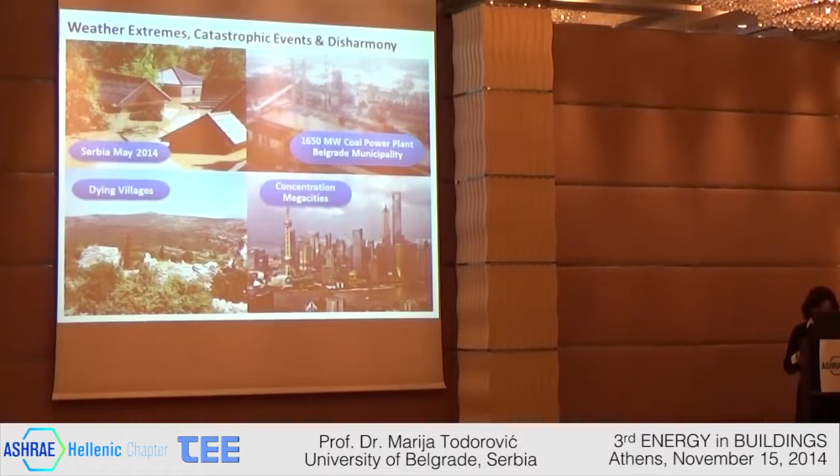Bottom left is one Mediterranean rural village which is dead, without people. That is Zagora in Montenegro. In these areas, it's important around the world to stop this huge migration to cities and dying rural villages, and to preserve cultural and natural resources, and to have sustainable local development based on preserving natural and cultural heritage.

There is one project of the Council of Europe running in Croatia, Cyprus, Portugal, and then it started also in Serbia, taking 2 municipalities. Most of the people engaged were thinking just about tourism, about craft and so on, but my intention and proposal, which was already accepted and will start in these 2 municipalities, is: okay, we will develop tourism, but everything is to be based on natural resources, so energy, renewable energy sources are to be used.

There are a lot of very important sites, for example a famous 5,000 to 6,000 years BC settlement in Serbia. They already had writing. There is also a mine there. It belongs to world history. It is to be preserved.

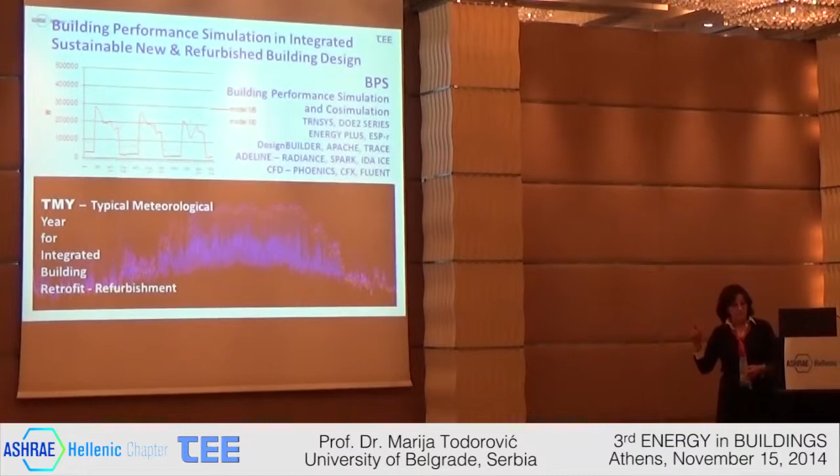For example, there is no summer regime. If you fix the building for winter only, then you will have peak loads in summer. So building performance simulation is to be used even for new design buildings, but also when refurbishing buildings. It is necessary to bring buildings to the best possible state concerning knowledge and available technologies.

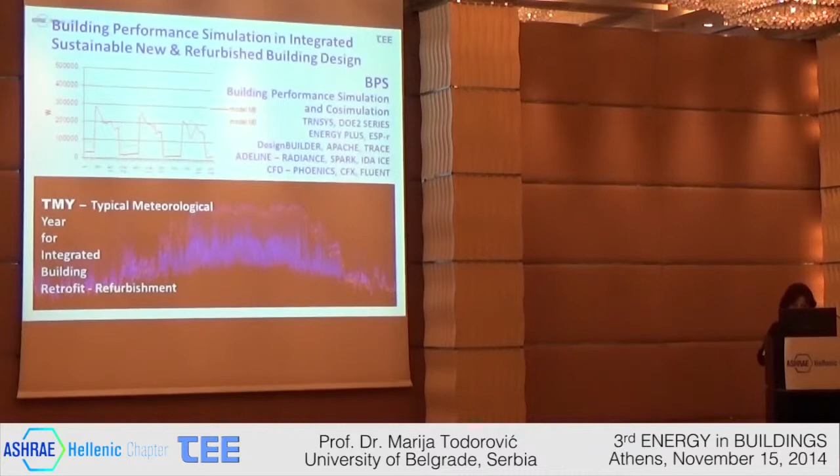Building performance simulation relates to many energy efficiency improvement measures. I'm not going to list them, but there are many measures, and it's often very important, even supported by banks, to analyze and implement just thermal insulation. They analyze the payback period, then just change windows. But the fact is, from my scientific and engineering experience, if you implement packages of all measures that you know and have, then you get the shortest payback period.

I even had one situation for downtown Berlin where the payback period was negative. So it's quicker, but the result was more commercial than doing it in parts.

It is of crucial importance, not only for new building design but also for refurbishment and renovation, to do deep energy refurbishment - defined in the European Association as renewable energy sources integrated renovation.

For example, many buildings in Germany had thermal insulation implemented - that was Directive 2002. Then in 2008 there's another directive for renewables, and then implementation of PV.

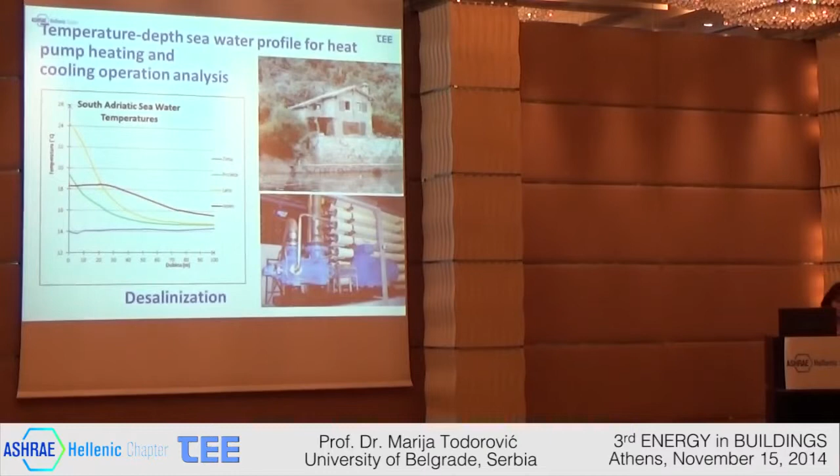There is a temperature field in the sea to know the annual changes, and together with all engineers - architects, civil, mechanical, electrical - performing building performance simulation. This shows the bioclimatic effect: without any optimization of the building, you can see the highest temperature can be nearly 50 degrees in summer, which was the case in France in 2003, when a heat wave took nearly 20,000 people's lives.

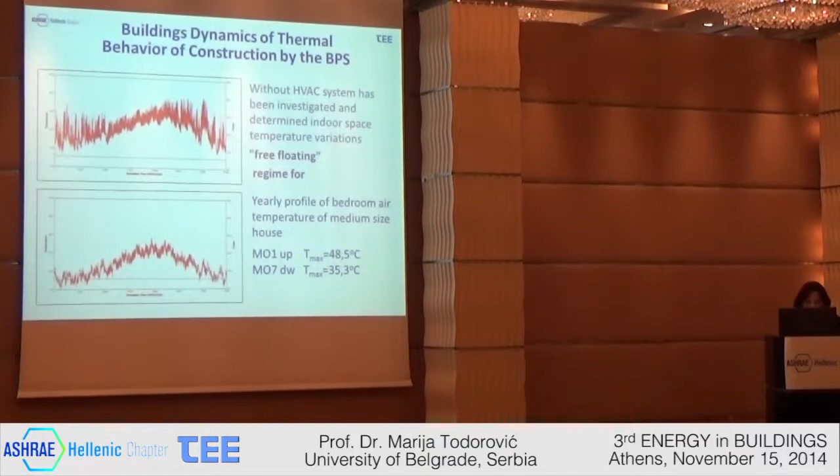And below, just with optimization, you see the highest temperature is 35. So it is already, but to have real comfort and secure health and life, it is to be air conditioned.

Finally, the project in 2013 was awarded Energy Global Award Serbia for zero CO2 emission and energy zero, let's say, only using renewable energy as an energy source.

I stress that there is urbanization, migration of people to cities from villages, but there are also parts of the world, for example part of Europe, where concentration is happening, like in Holland, Netherlands. So there are some areas where, on a certain way, we can say there is a certain pattern about harmonization.

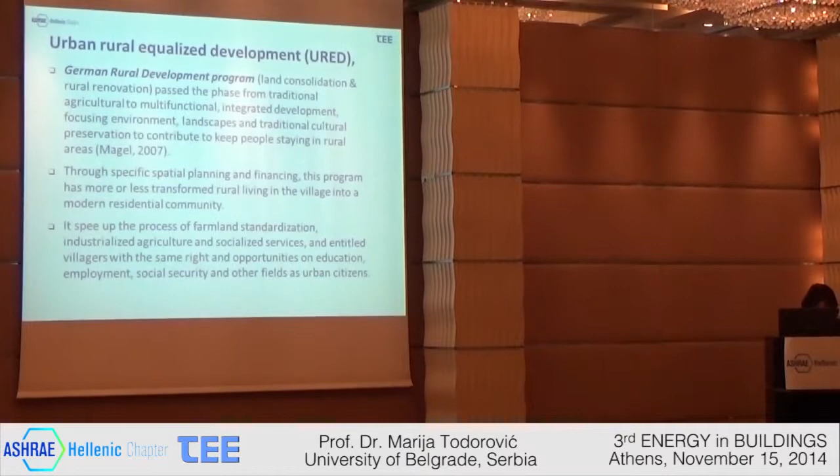The previous example did show that in rural areas we can definitely build new buildings and have settlements which are zero, because there is always enough place, either on the building itself or on the ground, to use solar, wind, and biomass, whatever is available. But in cities it is not always so easy, especially not in a 40 million people context.

This is in Belgrade, one residential area and residential building. We are all aware that buildings are the most important focus in the world when we are speaking about energy, because the building sector uses the most energy in the world, and second, it is most cost effective to invest in energy efficiency and renewables exactly in buildings. Of all buildings, residential is the biggest share. So renovation and refurbishment of residential buildings, and designing new residential buildings as zero CO2 emission, is very important.

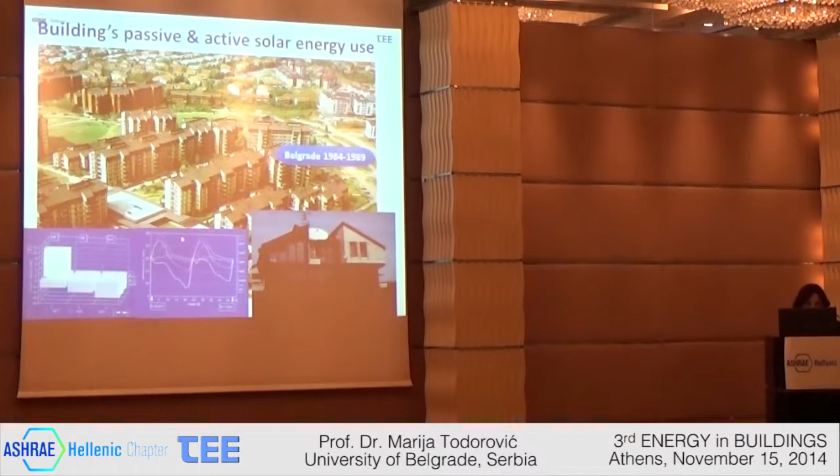You can see this was hybrid, passive and active, so that the temperature in indoor space, although the outside changes were really huge, changes were very fine for living.

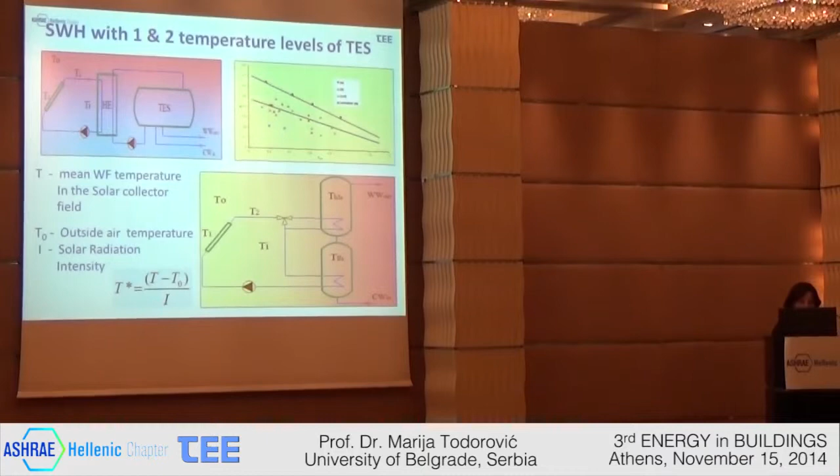So passive and active. In the same period, in '85, there were systems in monitoring in former Yugoslavia. There were 5 systems in 2 hotels in Serbia. In Montenegro there was 1 system on the airport, and in Kupari there was also 1 system. You see different types, and the results of all were excellent experiences, and they also enhanced, at that time, the existing industry of solar collector production.

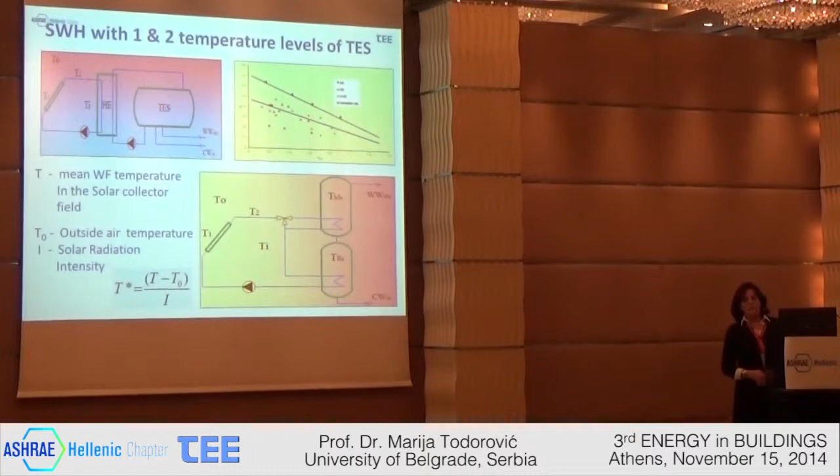It went into operation in '84 and is still in operation. Heat pumps were produced in Belgrade and solar collectors in Slovenia, and now it is renovated and going to proceed with its life. It is 3.5 megawatts - at that time one of the biggest systems in Europe, and still one of the biggest, and that is a great experience.

It is a system which could be spread and designed in a similar way in the Mediterranean. It serves swimming pool heating, sanitary water, outdoor swimming pool so the touristic season is extended, then space heating and space cooling, air conditioning. The investment was returned in 1.5 years because apartments with air conditioning were sold at a higher price.

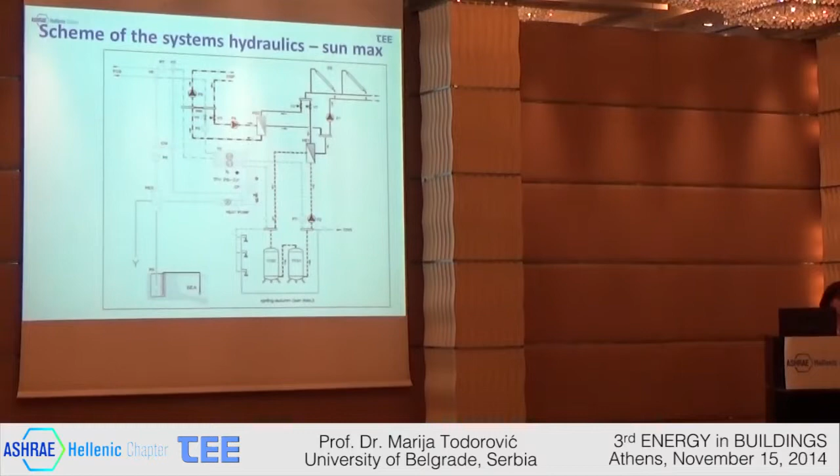That is the scheme. There is no time for me, but whoever is interested in these different examples can write to me and I can send papers or presentations. More analysis about the city and its possibilities - this is also very interesting.

That is residential, Belgrade, New Belgrade, residential social housing, but 80 to 90% of apartments have split units. Analysis by simulation did show that loads can be reduced 5 times for heating, and also 5 times for cooling.

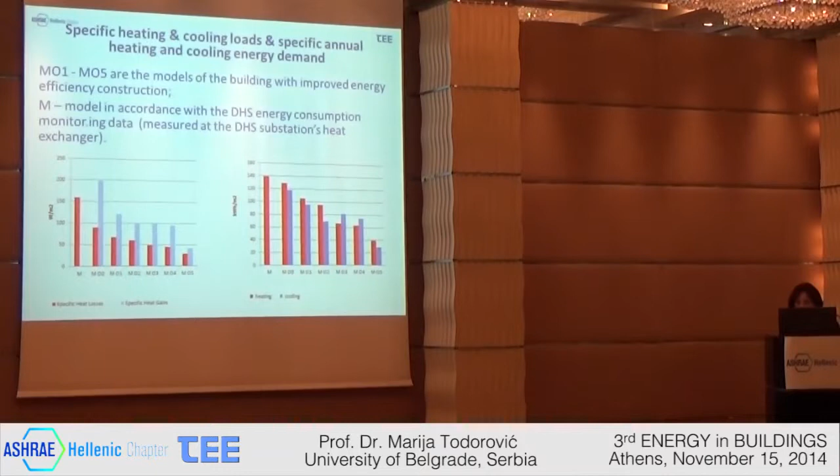The whole New Belgrade, the whole north part of Serbia, is on water. Instead of using outdoor air for releasing heat in summer and using it as a source sometimes in spring and autumn, groundwater can be used. With much higher COP, efficiency will be improved and even more reduction of loads can be obtained. So it is to be reconstructed, refurbished.

It could be cost effective to power heat pumps by PV, given the increased energy efficiency. PV can be added either as opaque panels, like you see on the right side, or as semi-transparent PV, like a second facade. On the part of the building where you see all these Venetians closed, people would like to have more dim light.

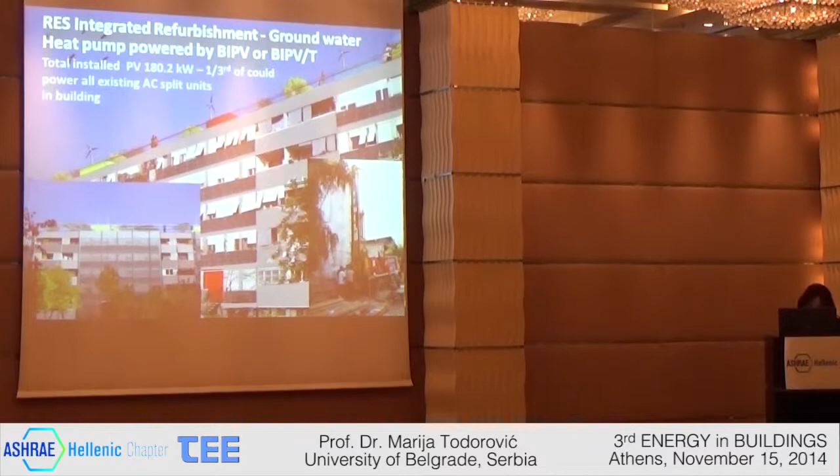Now, that is the last part of my presentation. It was my privilege and honor to be twice a member of the jury for energy efficiency in the category of the Solar Decathlon. Solar Decathlon is a famous competition of universities designing and constructing solar houses. It started in the US, in Washington, and in Europe they made a contract, with the first one in 2010 in Madrid, Spain, the second in 2012, and the third this year in Versailles, Paris.

And it was very nice with greenery, not only using renewable energy sources, but also with certain changes in social behavior. So there was, in one place, a shared washing machine and so on.

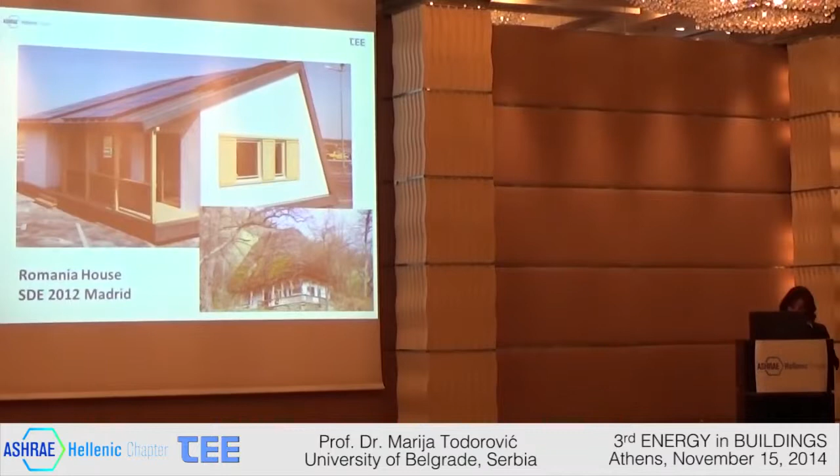It's interesting that Romania, for example, doesn't have a better economic situation than Serbia or Hungary, but Romania and Hungary had houses in both European competitions, and this year Romania even had 2 houses. This year Croatia also had one very nice house, but they were not officially placed in the competition. As jury, we found that they were not worthy compared to the others.

So in Paris there were 20 teams, and what's interesting is that the result of this high ratio of exported versus used energy, so much more exported surplus energy than used, was not so much a result of advances in PV technology, solar thermal, or PV thermal, but exactly the result of fine harmonization of structure, HVAC equipment, and thermal mass - harmonization of the building as a whole, of integrated building design.

This year is also interesting concerning my main topic, as several projects were dealing with density. It was also a new goal for the French Solar Decathlon to deal with dense urban areas. And in energy efficiency, the winner was this house from the Netherlands.

You see that it's a historic building, and they didn't get permission at first to do that. In certain countries there are very different rules about how to deal with historic, not real heritage, but still historic buildings - but they did it. They analyzed and planned to change and renovate, to use the money for renovation, and to integrate renewables and improve the energy efficiency of the whole building.

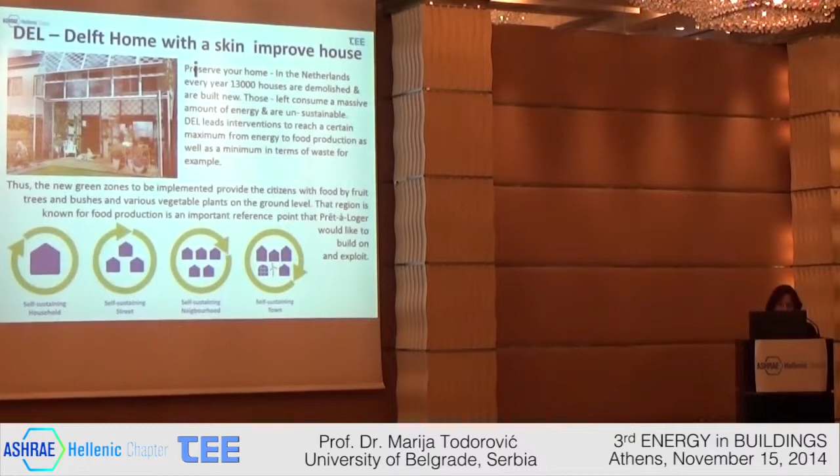What is important for all 3 European solar decathlons, and the base for such fantastic results concerning produced and exported energy to the grid, is that all buildings were connected in Schneider's micro smart grid. All houses are in the smart grid, and the smart grid is optimizing the use of produced renewable-based solar energy in the house - directing and managing which appliances are on when energy is available, without storage, to maximize what is sent to the grid.

They are also doing optimization within the whole settlement, to maximize use of what is available across all the buildings on the competition site, and to maximize what is sent to the grid. So the Schneider microgrid is a fantastic technology, permanently present in development across these 3 European solar decathlons.

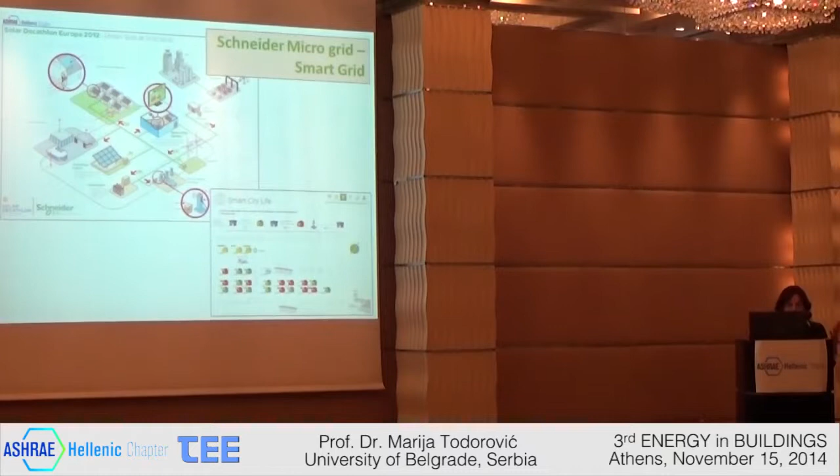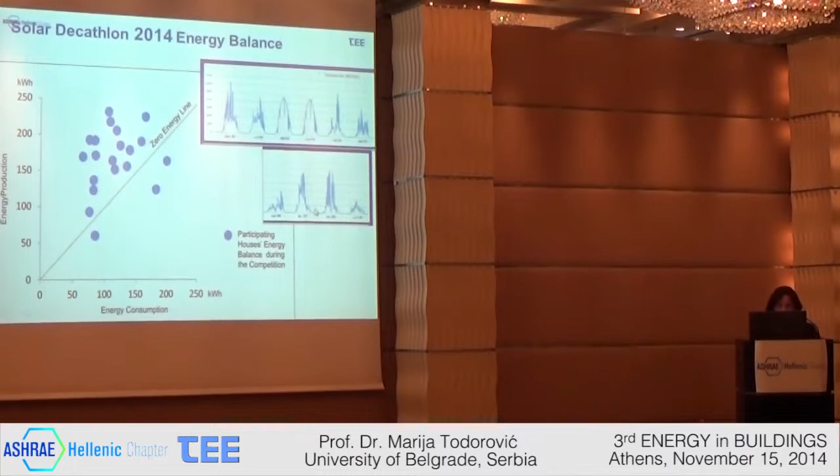These are insolation data from the 10 days of competition in Paris, and you can see that conditions were really bad, yet sustainable urban and rural communities are absolutely possible to develop and harmonize. Buildings in rural areas can become energy-plus, and that's definitely possible, while also producing enough energy for dense areas where it's impossible to cover all energy needs on-site with renewables.

That's my message about how to harmonize rural and urban sustainable development - to preserve natural and cultural heritage, and to provide people in rural areas with the same standard of living and quality of life as in cities. We have internet now all around the world, so they can live in those areas. I had a few nice slides of different rural parts - Serbia, Montenegro, the Adriatic, and so on - there are a lot of such places.

Young people - there are so many unemployed but educated people. They can work in rural areas for Aramco or any other famous world company, enjoy life, have healthy children, and that is also part of sustainability - without the worry we see around the world more and more these years - to really not only dream, but expect and reach a sustainable future.